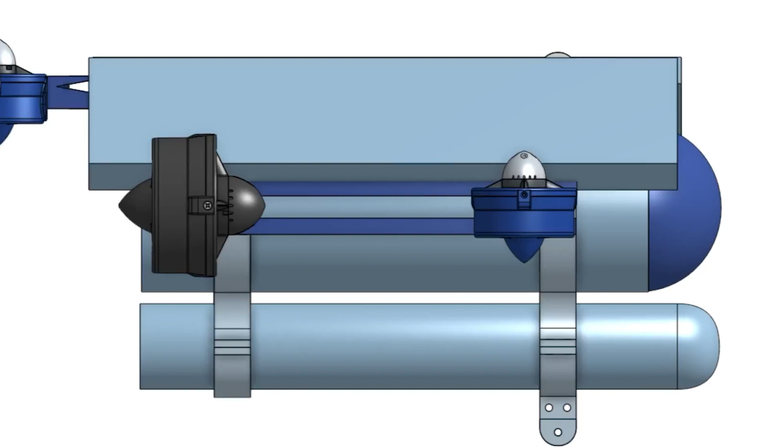So that's the project then. Design and build a remotely operated vehicle, ROV, to descend to these reefs and create 3D maps of them. Quick design overview. This is the first prototype. It's designed around these two main enclosures that house all the electronics. They're rated to 100 meters depth, plenty for this project.

It's powered by 5 thrusters, 2 horizontal, 3 vertical, giving it control in nearly all directions except for moving laterally. Attaching everything together is the frame, which is fully 3D printed. All parts are also small enough to fit on most 3D printers that are available on the market.

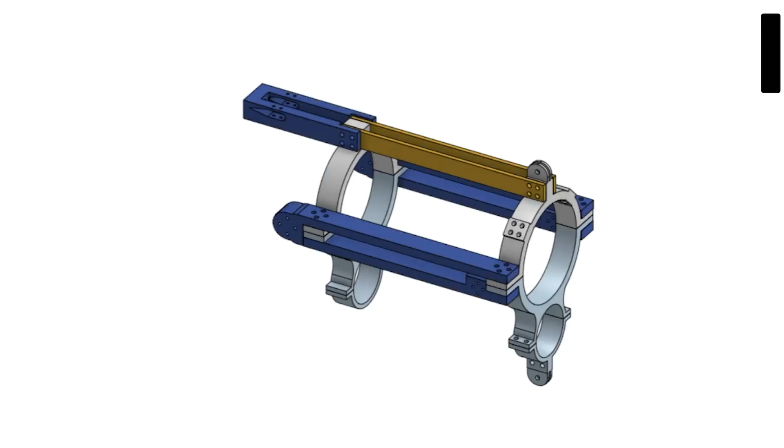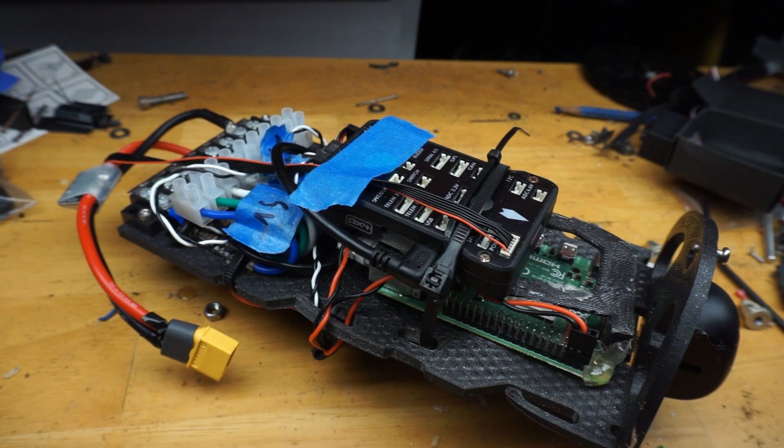In order to achieve the project's goal, this design has 3 cameras, one looking forward, one looking down, and one looking to the side for mapping, not including the internal camera for navigation. The control system is fully digital and based on commonly used open source software.

Testing of the full vehicle was unfortunately rather limited. Only a few full function tests were performed. However, it was demonstrated to be capable of creating high-resolution photogrammetric maps of the seabed and descended to 15 meters, about 50 feet, depth with no issues.

After basic function tests, in order to better understand and refine parts of the vehicle, testing was broken into 4 major sections: thruster improvements, structural improvements, mapping method selection, and hydrodynamic performance. That way, each of these can be more scientifically tested to find the optimal result. I don't have the time here to cover the reasoning, methods, and results for all 4, but you can pause the video at any point if you want more information.

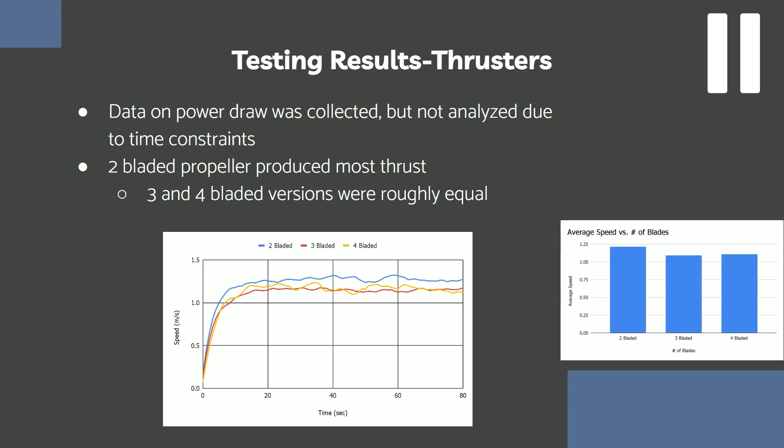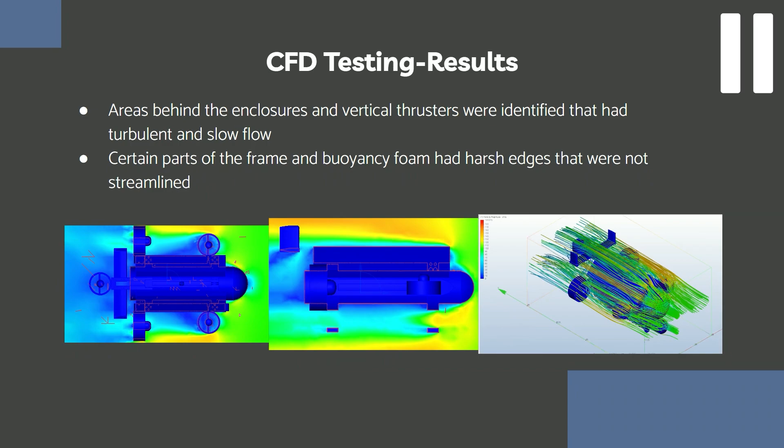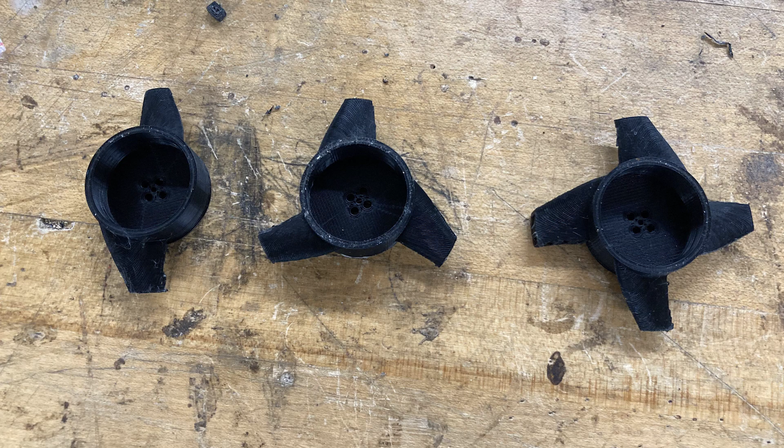To summarize function testing, PETG was found to be the most structurally efficient material. The two-bladed propeller was the most efficient. The circle method of mapping was the most effective, and there are a lot of areas of poor hydrodynamic performance behind the enclosures and vertical thrusters.

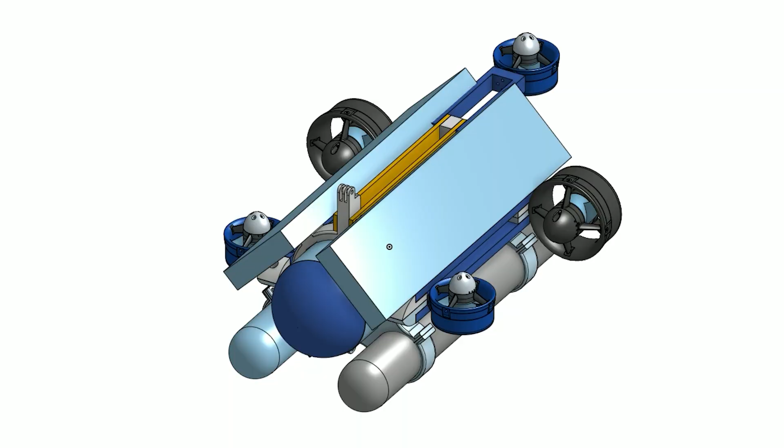After testing concluded, a full second version of the vehicle was designed, mainly based around more internal space for cameras and battery capacity, as well as some hydrodynamic optimizations and other improvements. However, this was not able to be built in time.

In the future, more comprehensive testing of the 4 elements that were tested here should be performed, as well as testing for other elements more relevant to the vehicle's operating depth, like pressure resilience and lighting.

In conclusion, this project discovered the beginnings of the development of an underwater ROV for performing photogrammetric mapping on MCEs. Initial testing revealed that the vehicle was underperforming in some critical areas, although it was able to meet some of the requirements. Additional testing was then broken up into multiple sections to more scientifically test each individual component.

While no vehicle was created that adequately meets all the design requirements, the testing that was performed can lay the groundwork for future iterations of the ROV. While this project may seem limited in applicability, the potential it could have is enormous and should not be understated. Easing some of the difficulties associated with studying MCEs could lift the curtain on a lot of the unknowns and mysteries surrounding reefs at these depths.

Additionally, the maps it creates could be used to open up avenues of study as well as methods of conservation that were impossible beforehand. Looking even more broadly, the ROV also could be used for shallow water applications as well as numerous other fields. Alright, I believe that is all.